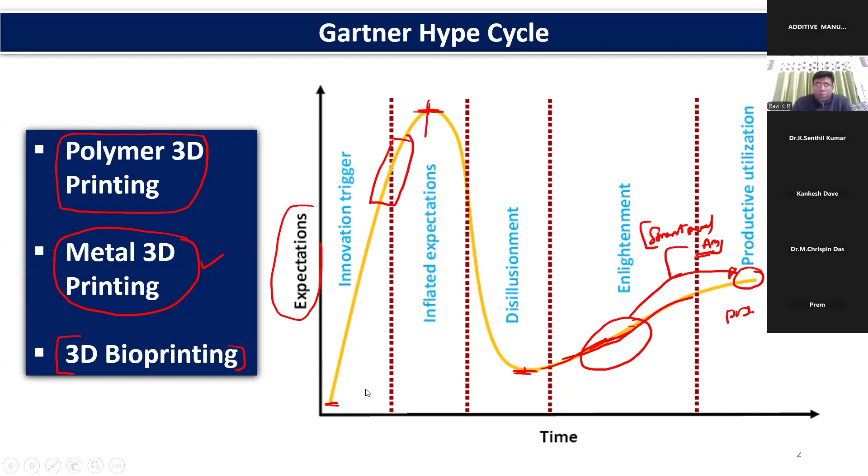If you look at 3D printing, metal additive manufacturing is not very different. All 3D printing technology goes through this particular cycle: initial CAD model, creation of STL file, slicing software, and creating the tool path. Then where does the difference come? The difference comes at the 3D printers we use.

There are different types of technologies available for polymers and different types for metals. Within metals, there's a wide range of technologies available. Most of the changes we see are on the 3D printer part - how we print the parts based on the feedstock material and the kind of source, which can be a heat source like laser or electron beam or other different sources. That's how 3D printers actually differ, and this is where the process is completely different from one 3D printing technique to another.

First of all, we all have questions about when to use additive manufacturing. Traditional manufacturing is actually still being used - I would say additive manufacturing is complementary. It is not going to replace traditional manufacturing technique, because in traditional manufacturing, as long as the complexity of the part is not very high...

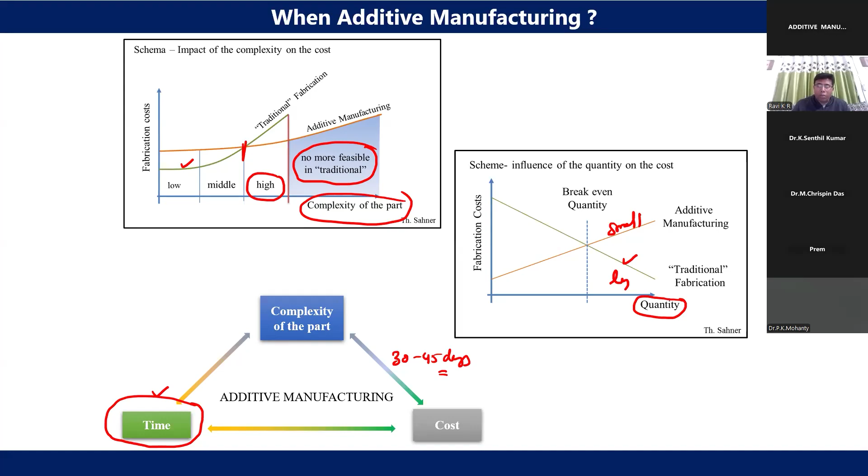If you look at additive manufacturing, especially metal additive manufacturing, we have 4 different categories based on powder bed or feed based process. If the powder bed is used, it's similar to the SLS process in polymer, so we use a bed here depending on the source to melt the powder.

It can be a selective laser melting process or electron beam melting process. In electron beam melting, we use electron as a source. In selective laser melting, we use laser as a source.

On the other hand, we can use laser as a source to melt the powders. In this case, we don't actually have powder beds. We flow the powder instead, similar to welding. Instead of filler materials, you feed the powder to the system, and that will be melted using the laser.

This process will be connected with either a 5-axis CNC machine or through a robot, and we can do the process that way. Instead of powders, one can use wire also, which is what we call wire arc additive manufacturing.

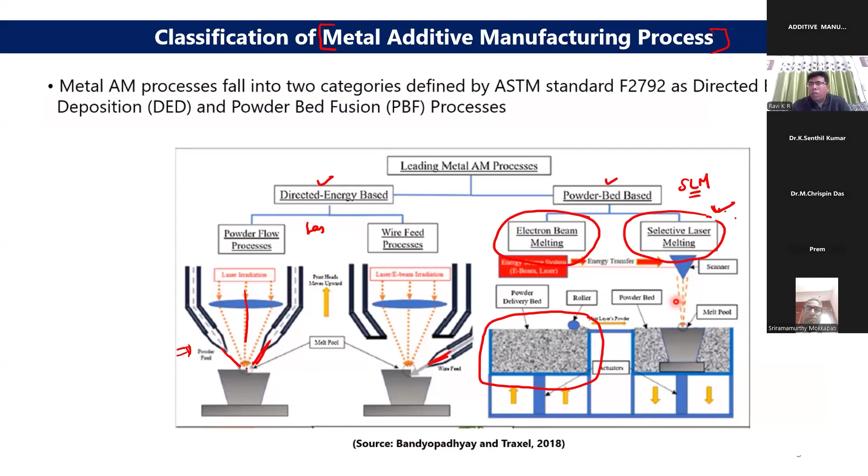In our group, we are doing a lot of work in the area of direct energy deposition. I'll concentrate more on how we converted a normal DED machine into a smart additive manufacturing machine. But since selective laser melting is very widely used, I'll give a glimpse of that technology first, then we'll get into the direct energy deposition process.

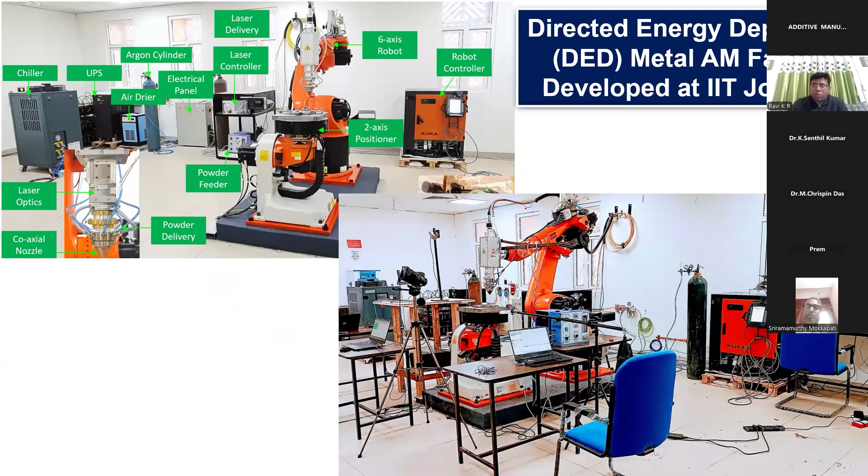If we look at the kind of technology we have in IIT Jodhpur, this is a machine that we built from scratch, available in my lab. It's a direct energy deposition facility that we built from scratch. We actually developed 2 machines — one is in my lab, and another one we built working with an industry partner.

This is the final machine that we built for our project, and we built one at the industry partner as well. These are final machines for direct energy deposition. Both of these two machines are indigenous machines we built from scratch.

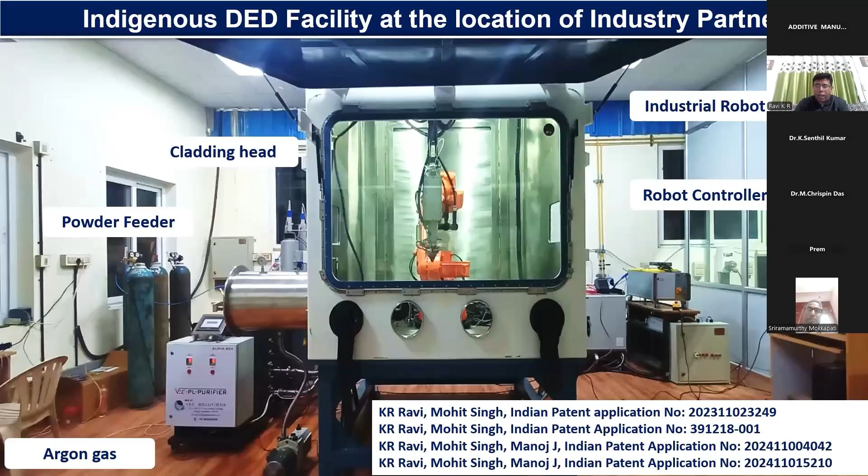In addition to that, in IIT Jodhpur we have a laser powder bed fusion machine, which we did not build ourselves — there is a company in Bangalore that made this particular selective laser melting, laser powder bed fusion machine. In addition, we have electron beam melting, which is the first such machine in any IIT or IISc in India — an electron beam melting additive manufacturing facility.

Though I'm not going to discuss this particular technique in today's lecture. Let us first try to understand what laser powder bed fusion is. I hope yesterday's lecture by Dr. Vinod would have given a glimpse of this particular process, but I'll just brief this process — I hope I'm not going to repeat it.

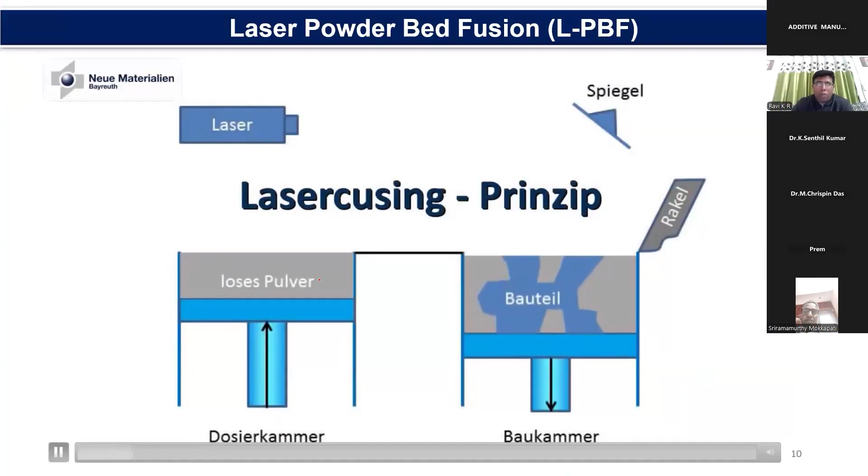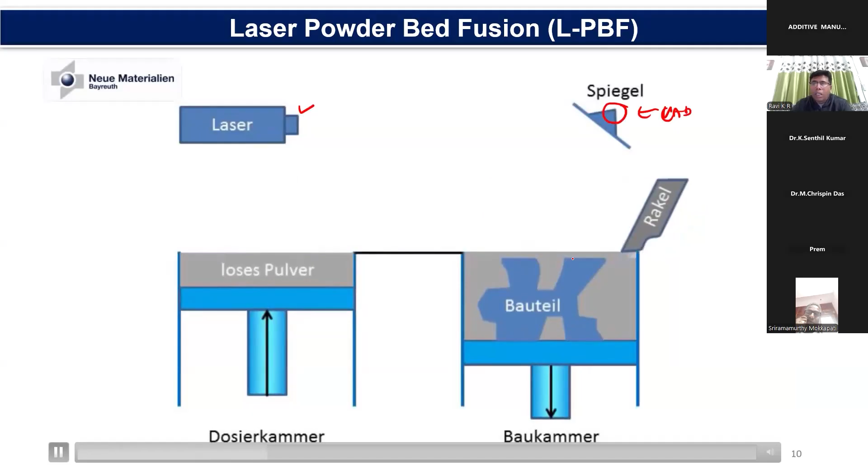If you look at this process, as I told you, we fill a layer of powders, usually in the range of 30 to 40 micrometers. We use the laser source, and the galvo moves depending on the CAD file we generate. Each layer is printed layer by layer, then the bed moves down, and again we print layer by layer in this process.

In this case, the feedstock is powder. The laser will melt the powder in a localized region depending on the CAD file created for that particular layer, and the galvo will take different regions of the powder bed to melt with the laser.

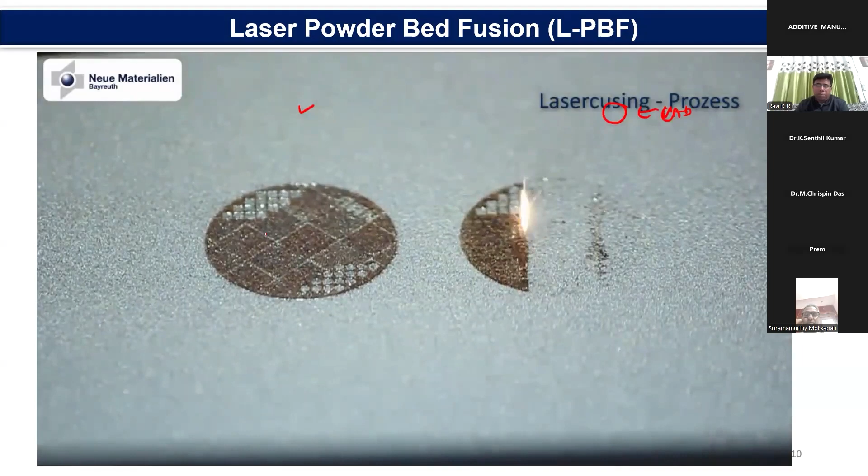Now the question is, are all metals and alloys printable? We may think all metals are printable, but the answer is no. In powder bed fusion process, or laser powder bed fusion, and in DED process, we use laser as a source to melt the powders. In both cases, absorption of the laser is very important.

We usually use laser somewhere around 1064 nanometer, it can vary from 950 to 1064 nanometer. All materials have different types of absorption. The material should absorb the laser; if it absorbs, it can melt the powder. If the material reflects, you cannot melt the powder.

If you look here at gold, silver, and this material... this is silver, this is gold, not silver. This one is silver and gold, aluminum and copper. Look at gold, silver, and copper in this condition - to an extent they don't have much absorption, which means these materials you cannot actually print. On the other hand, if you look at iron, it has almost 40 to 45% absorption. If you take steel, it would be somewhere in the range of 50% absorption.

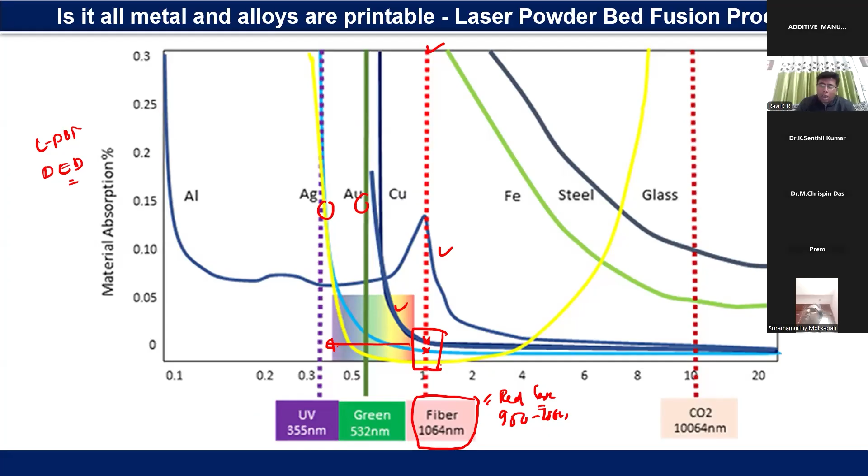This particular graph gives a much better idea of how it works. Around 1064 nanometer, this is a standard IR laser. In this range, nickel, titanium, and steel all have significant absorption, so you can melt the material. Other materials like copper, gold, silver, and aluminum have very less absorption in this range, so you cannot actually print these materials.

Now the question is, can you print all types of powders or not? For any of these processes, the particles should be spherical - we generally call these thermally sprayable powders. If it is not spherical, you will not get uniform powder feeding, which would have a lot of impact on your final product. Usually all powders are not printable; the first requirement is that it should be spherical.

If it is spherical, can I use all powders? What about the size? The size also varies depending on the technology used. Especially for laser powder bed fusion, it is usually smaller, around 15 to 50 micrometers. On the other hand, for DED we use 50 to 150 micrometers, because the bigger the powder, the smaller the resolution. But unfortunately you cannot use smaller size powder for DED, because the powders flow under gravity. Though we use carrier gas, it's not good enough to carry the powder smoothly to the molten pool, so you need powders of slightly bigger size.

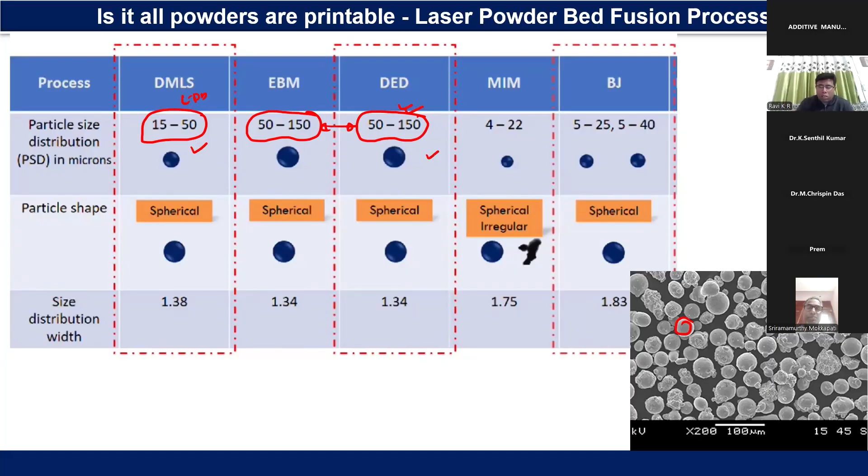In electron beam melting, there are very complex phenomena, so I'm not going to discuss that in detail, but the powder size is more or less the same as for direct energy deposition. Today's lecture will concentrate on powder bed fusion and DED. I have already discussed the powder bed fusion process, now we'll get into the direct energy deposition process.

In direct energy deposition, there are two variants we use: one is based on CNC, and some machines are based on robots, depending on the requirement. If your interest is in making smaller parts, you should go for a CNC based system. If you are interested in making bigger parts, you should go for a robot based system.

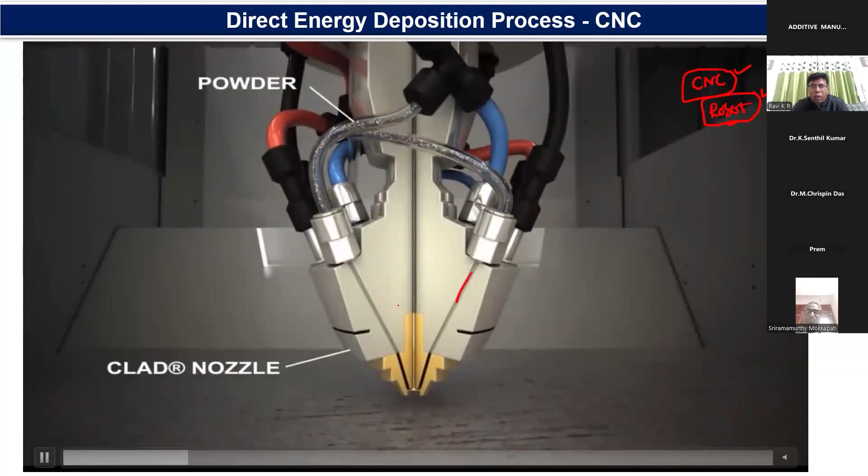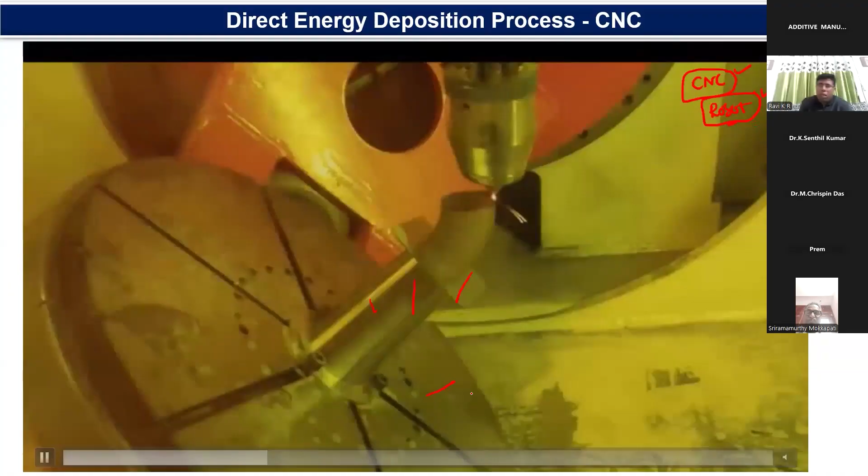Now we can look at how the technology works. In this system, the powders are fed through a coaxial nozzle and the laser comes from the center. This powder will melt with the laser. The whole head starts moving depending on the CAD file given to the system. This motion of the laser head and the substrate is controlled by a 5-axis CNC - you have 3-axis on top and 2-axis on the bottom. On the other hand, in a robotic system, which I'll discuss next, you can have 5-axis, 6-axis, or 8-axis robots, depending on the features wanted.

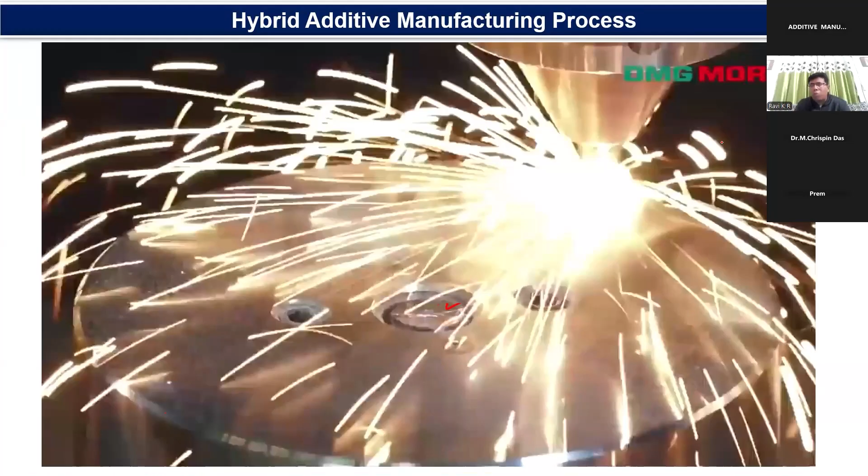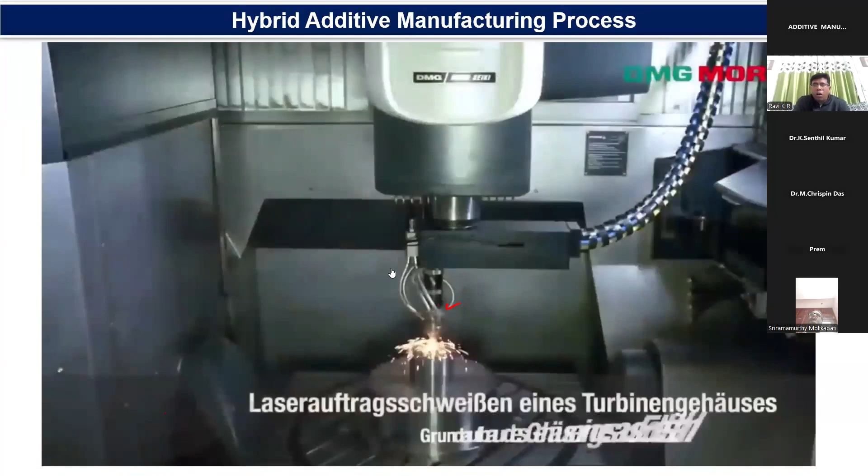Hybrid manufacturing is something I'm not going to discuss in detail - it's about doing both printing and machining, because printed parts usually do not get a good surface finish. One can do both printing and machining on the same platform using CNC.

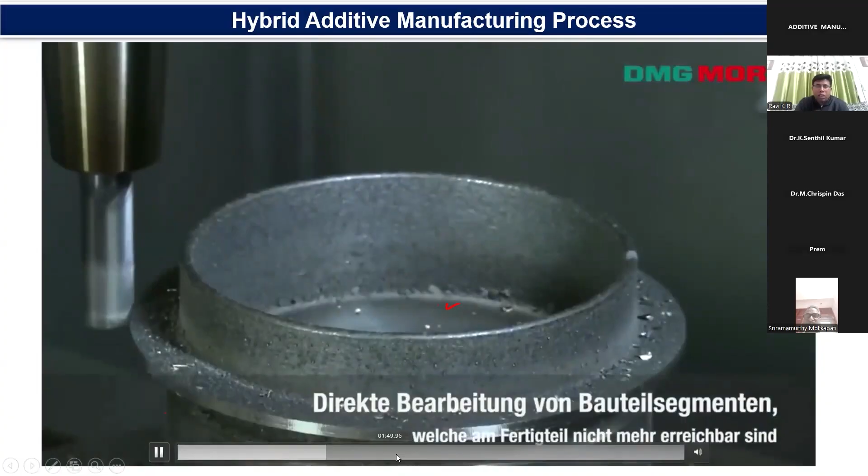The program-wise, it is the same, because the program we use for a CNC machine can be modified slightly. One can use a similar program for CNC for both printing and machining.

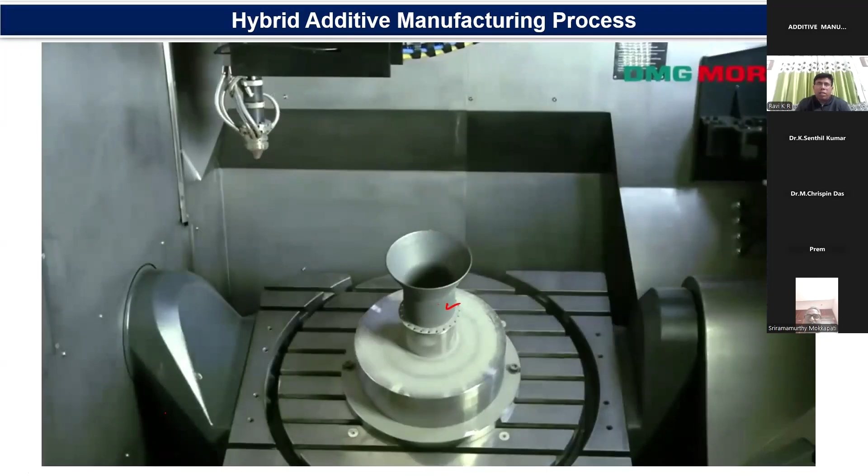You can see now the printing is going on. One would actually use the same platform, just take out the head, move the head, and you can do the machining also on the same platform. Once we complete the printing, you can do machining too.

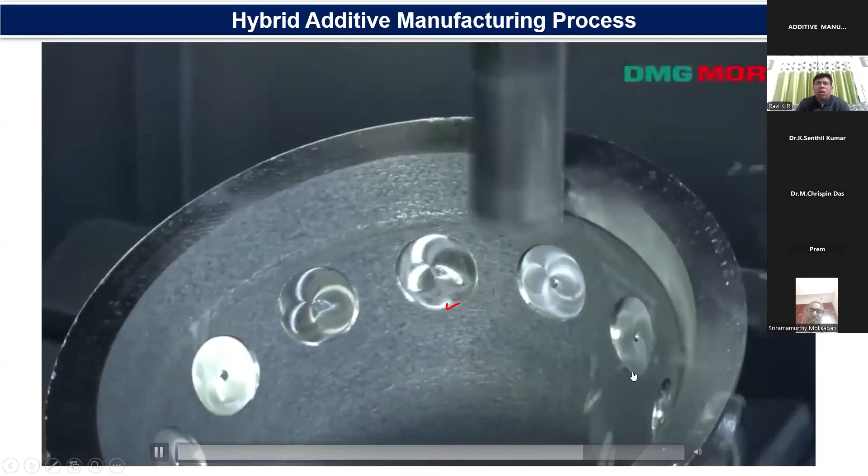But there are challenges, though I'm not going to discuss them now. Though it was invented long back, it is not in real practice, because there are certain issues in terms of understanding and utilization of the process.

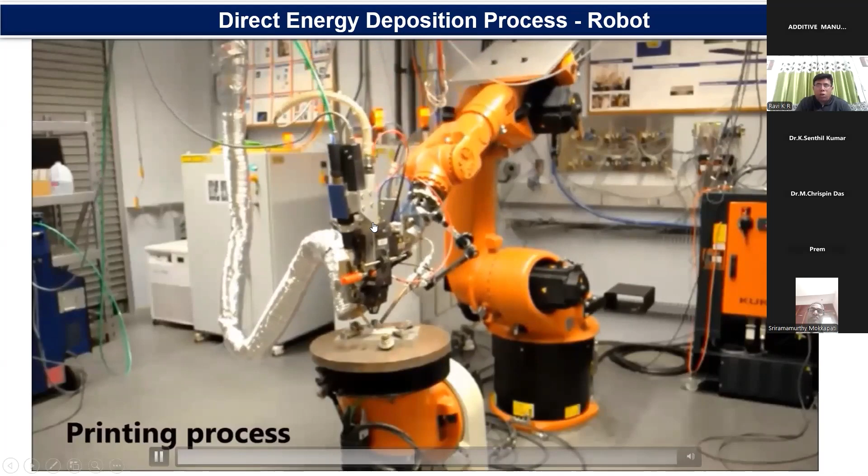So the technique I have in my lab is very similar to this robot-based system. You are going to have 6 axes on the top, and the bed is going to have 2 axes - it will rotate and tilt - with the other 6 axes coming from the robot. It's more or less similar. The major advantage is that you can go for very big components. In CNC, the volume of the part is decided by your bed size.

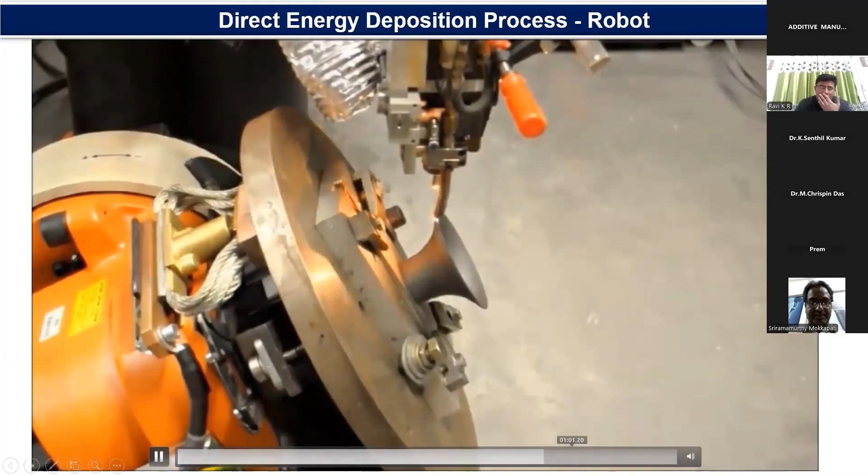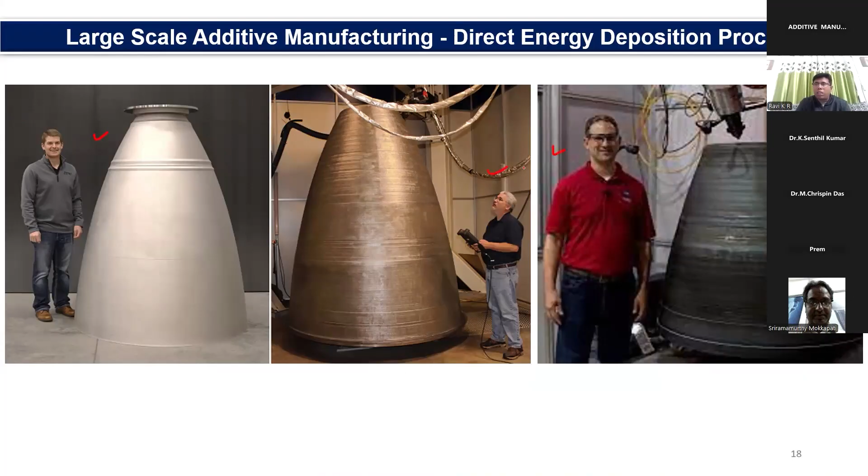As I told you, in direct energy deposition, one can make very big parts. You can see that here. In addition, it is very useful for repair manufacturing, especially turbine blades, where you need proper control over the crystallographic orientation, which cannot be achieved by normal welding technique. Repair manufacturing is one of the major advantages of the direct energy deposition process.

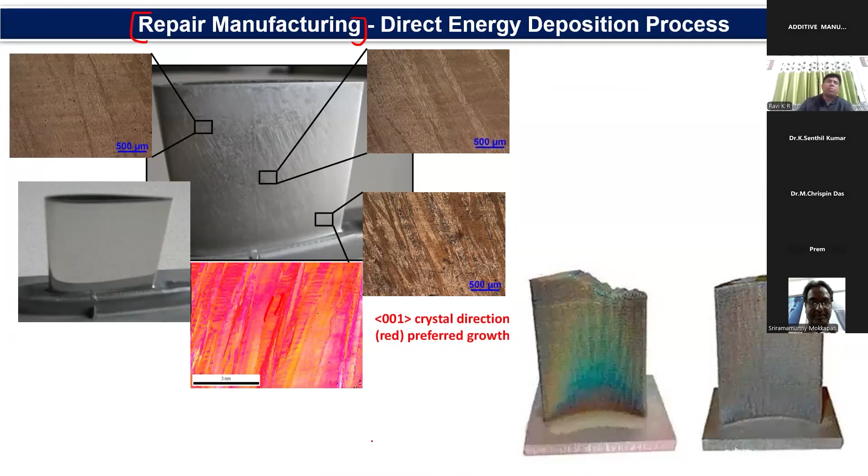Another thing is one can make functionally graded material, which is having a lot of interest using this direct energy deposition process. One can make multi-material because you can feed different types of powders at different layers, and within the same layer also have different types of powders. You can make composites, including graded composites, using this technique, which is very useful for various applications.

So if we look at the technique-wise comparison, why do we use certain conditions for powder bed fusion versus DED process? If you really want a big part, the laser DED is better. But if your part complexity is very high, then we should go for powder bed fusion, because in powder bed fusion you don't have any design constraint - you can print any complex parts.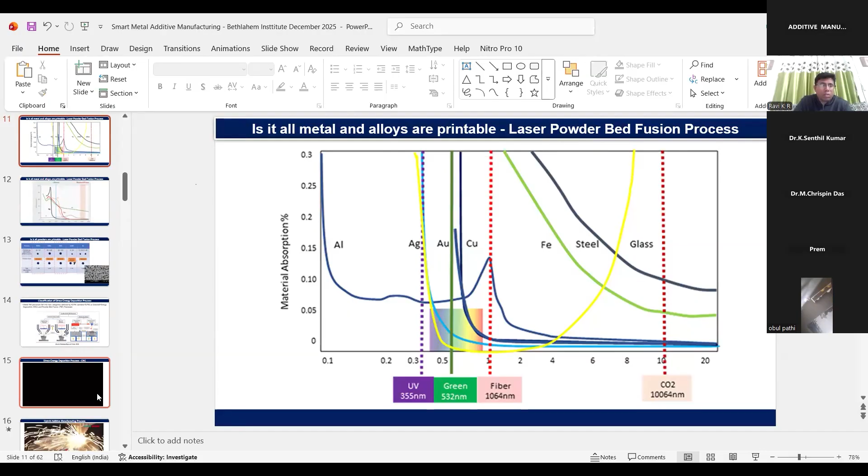The powder size, which I already discussed - one thing I did not discuss earlier, though we use laser in both cases, usually we use 100 watt to 500 watt in a powder bed fusion process. On the other hand, in a DED process, we start with 500 watts.

In DED, we start with 500 watts and go up to 3000 watts because you need slightly higher laser power. Obviously, the higher the laser power and the bigger the size of the particle, your surface finish would be poorer. On the other hand, one can actually print the part much faster.

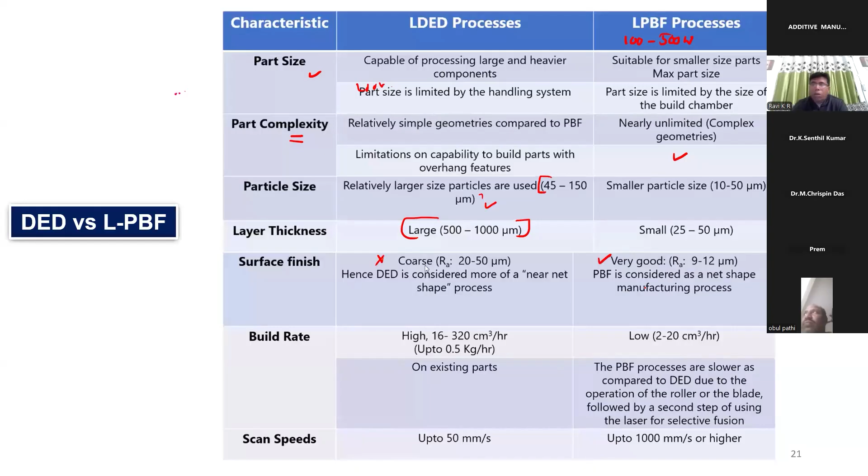As I told you, we are using 200 watts here, while we use higher laser power in this particular condition. Because of this higher power and coarse particles, you will always get good layer thickness and your productivity would be very fast. But on the other hand, surface finish would be a problem. If you really want good surface finish, you should go for a powder bed fusion process. The build rate, since we are using higher laser power, higher layer thickness, and bigger powder, gives a very high build rate.

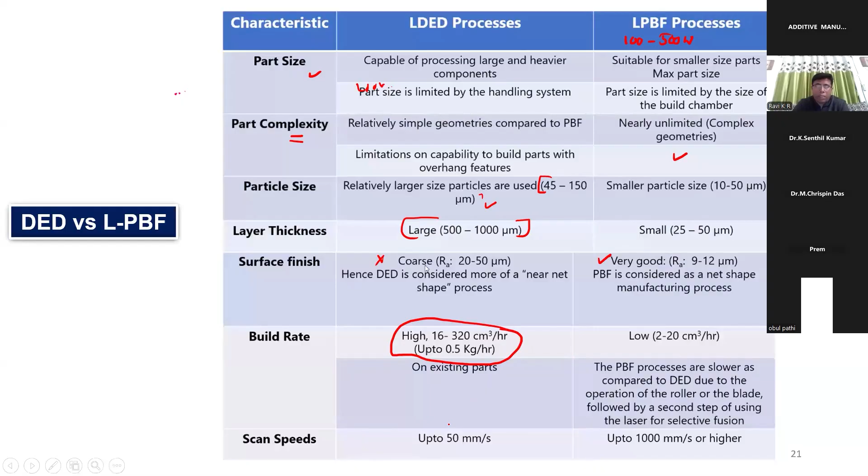The scan speeds, in terms of productivity, DED is better. Multi-material capacity, as I told you, DED is better, and repair can be done in this process. The design freedom is low when compared with powder bed fusion process. In powder bed fusion, the design freedom is extremely high - it's like my polymer printer, you can give any design and print the part.

This part, as I already told you, has about 13% of market share, while this one has 72% of market share.

Okay, now we'll get into the part of smart manufacturing. Till now, I have discussed the conventional manufacturing process.

Now, when you look at the quality of the part or object that we make, it depends on many parameters. One thing is you need to have the accurate dimensional accuracy that you need, which comes from the accuracy of each deposited layer, then the volumetric accuracy.

This depends on what kind of scan strategy we use, accuracy of the deposited tracks, 3D model resolution, layer thickness, and powder particle size. As I told you, the bigger the layer thickness, the lower your accuracy would be. Again, the bigger the powder particle size and morphology, the lower would be your accuracy.

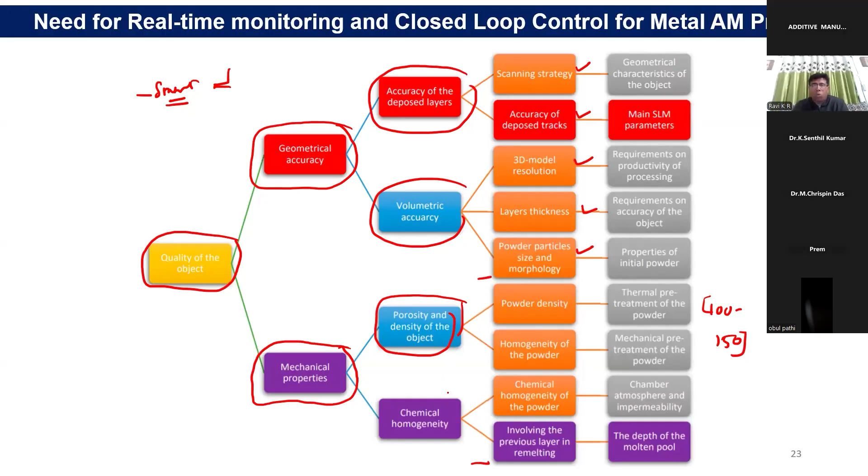So if you really want to have minimum defects and chemical homogeneity, we need to have a smart metal AM process.

But all these parameter variations are usually done by people using the conventional, traditional method—making the parts and then checking the microstructure and mechanical property. Then you vary the parameters and repeat this process. By doing this, even for any new material, you need 1.5 to 2 years to identify the optimum process parameters. So what is the alternate option?

The alternate option is to do a modeling process. Either you can do a CFD simulation—heat transfer and fluid flow simulation—yes, you can do it.

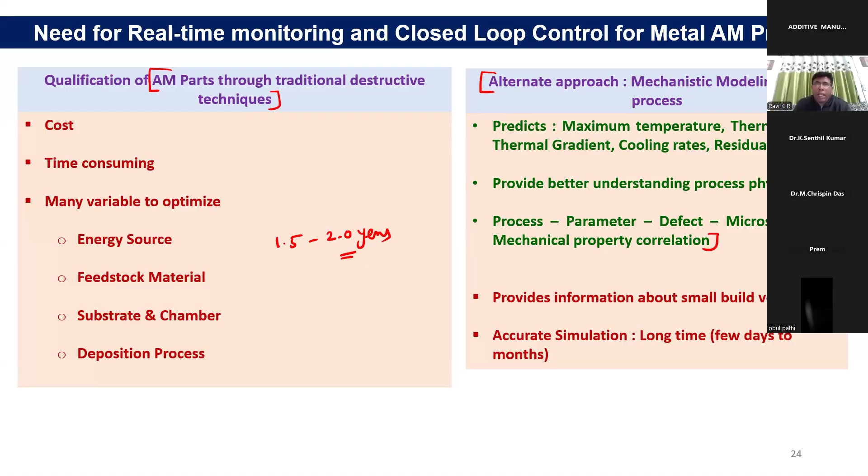Usually, let's say I want to print one layer from here to here. This will be done in 30 seconds. For that condition, if you want to run a simulation process, it will take 30 days.

Imagine making a full component—running a simulation like that is not possible. But usually we run a simulation for a single layer, or maybe multiple layers, fine. But the thing is, even for identifying the optimum condition without doing an experiment, one can actually do it, but you need to spend a lot of time on that.

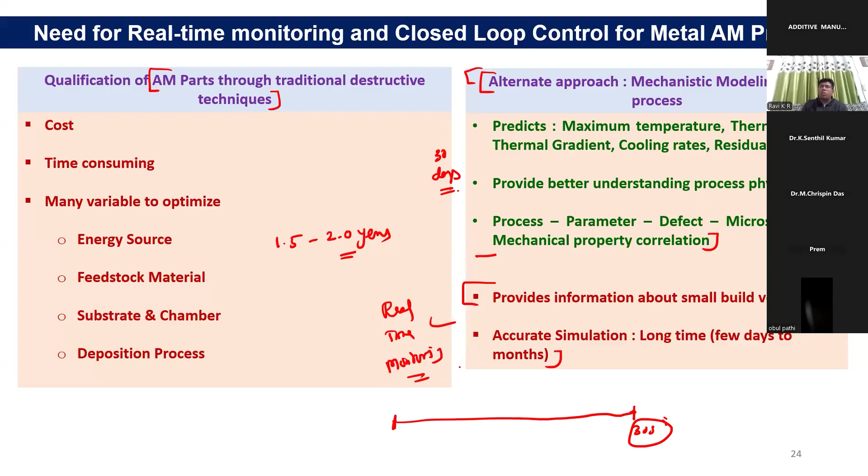So what is an alternate option? That's where we come to a technique called real-time monitoring—meaning in-situ monitoring of this process using several sensors. One can understand exactly what happens during this additive manufacturing process.

As I told you, various types of sensors are available. In our lab also, we have various types of sensors. But the thing is, each sensor gives you information from a certain region. If you look at this whole process, you can consider this is your bed—something happens below the surface, and something happens above the surface.

So usually most of these techniques give you information about what happens above the surface—it can be the geometry of the melt pool or the plasma plume, whatever comes from the top of the surface. But nothing gives you what happens inside.

But what happens below the surface is important, which actually influences your final outcome in terms of microstructure, defect, and property. Most of the techniques cannot provide that kind of information, except for a few techniques which I will discuss a little bit later.

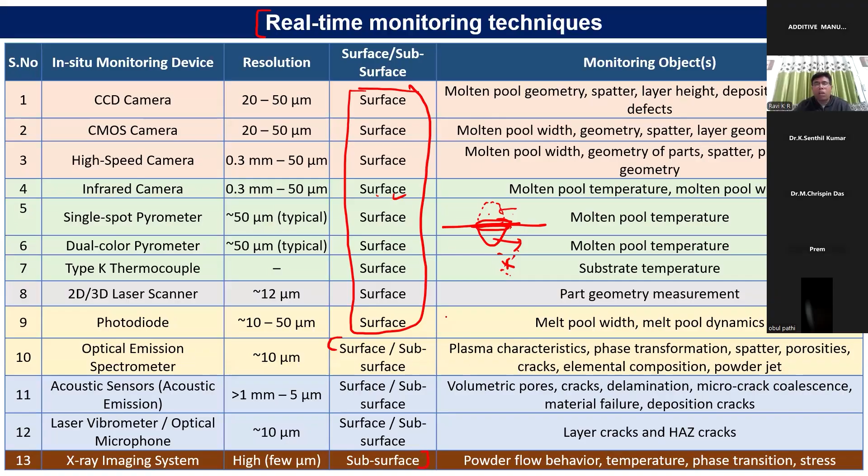Another thing we need to do is monitoring—monitoring means I can identify the defect. But identifying a defect is not good enough, because I need to control it so that a defect won't form. That is what we call closed loop control, which I will discuss a little bit later.

Okay, now let us look at real-time monitoring. This is real-time monitoring where we use a high-speed camera. One can get the powder distribution, powder size, and flowability. One can understand the melt pool width using the high-speed camera. The spatter formation can also be understood using this high-speed camera. These are our own results.

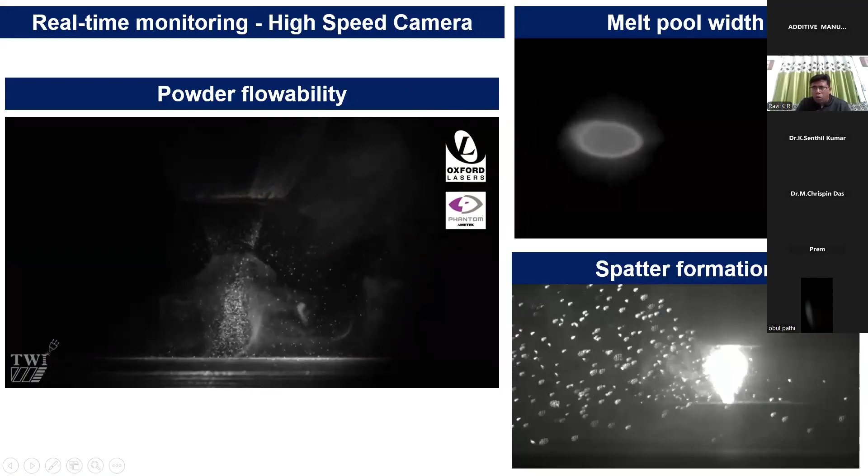So this is one of the interesting techniques, though it cannot be connected with normal machines. This requires a synchrotron facility. We do not have anything like this in India at this point of time, or else you need very high energy X-rays.

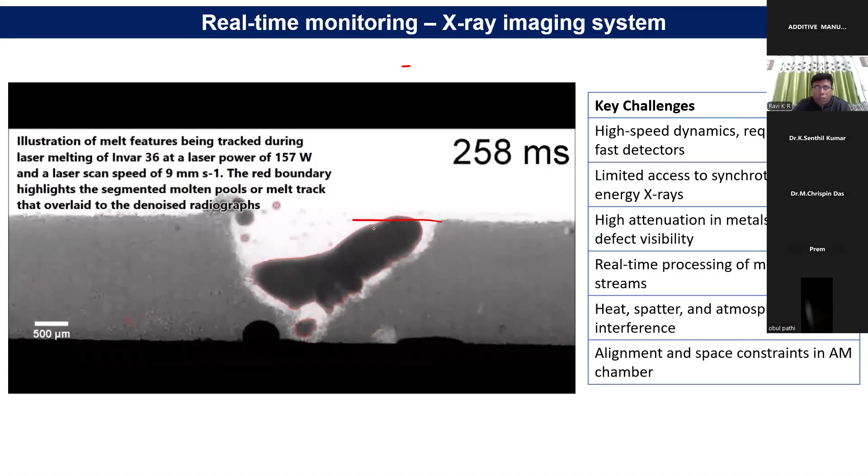You can see here what happens on this surface. I need to understand what happens on the subsurface. This particular technique will give you an idea about the defects, these are the defects which are forming, and this understanding is very important. This can be done using X-ray imaging, but this technique will only give you an idea about how the defect forms. You cannot actually use it to control the defects. You can see all this information very nicely.

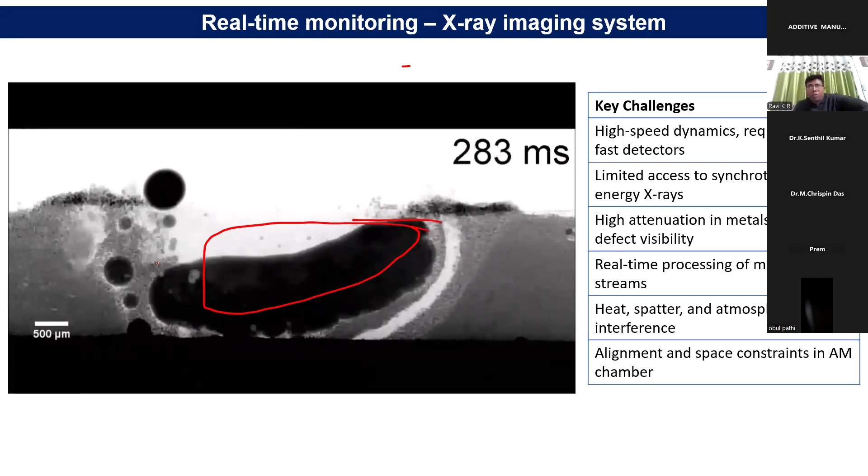On the other hand, one can easily control the defect using an IR camera, which I will discuss a little later. One can use the IR camera to understand the melt pool width, length, temperature distribution, solidification rate. One can also identify whether a keyhole defect is formed, or a lack of fusion defect is formed.

But these techniques usually come in the form of video. Then the video should be converted into images. Then you need deep learning algorithms to identify the classification of defects. In real time, it would be a very complicated process. You will get a large volume of data, which is very difficult to analyze by human eyes, and you need very sophisticated computational algorithms, like deep learning algorithms.

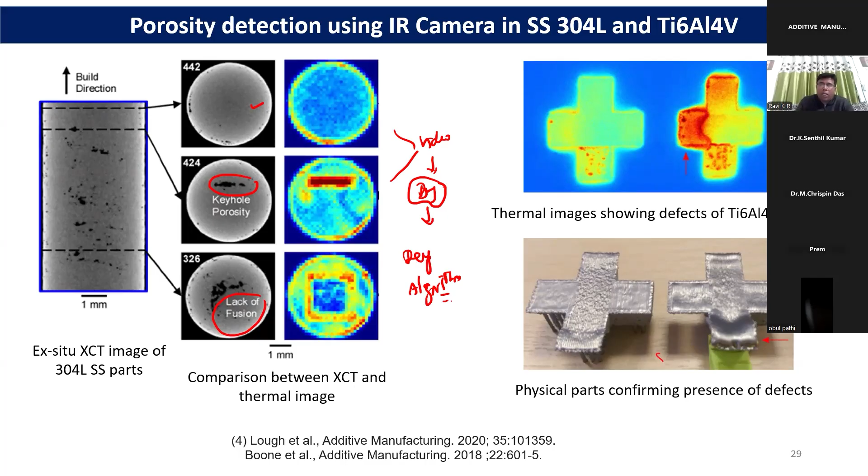Even with the deep learning algorithm, you will have a large volume of data which is not useful while you are running this machine. This machine runs 2-3 days continuously to make the parts, so you will get several terabytes of data. Analyzing that data would be very difficult.

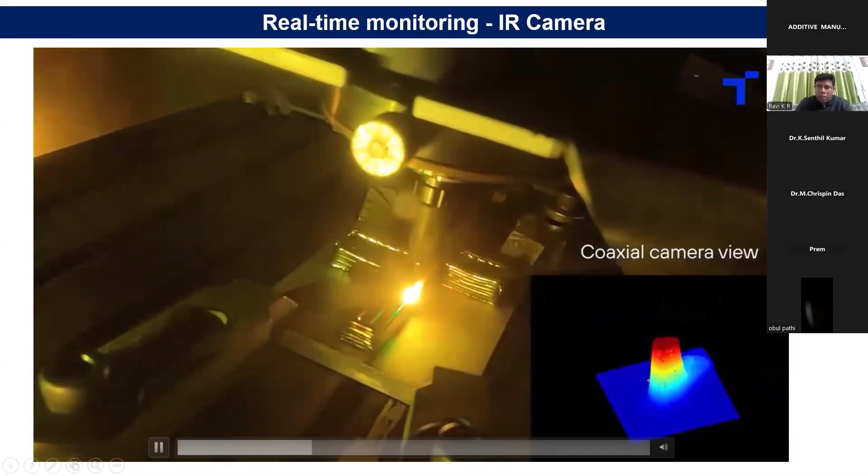But this technique has the advantage of looking at this coaxially. One can actually understand how the temperature profile occurs during the printing. This is one of the real-time monitoring techniques people use, the IR-based process.

Okay, now we'll come to this technique. What kind of defects will we be getting? Usually we get lack of fusion defects, keyhole defects, and we also get balling and spatters.

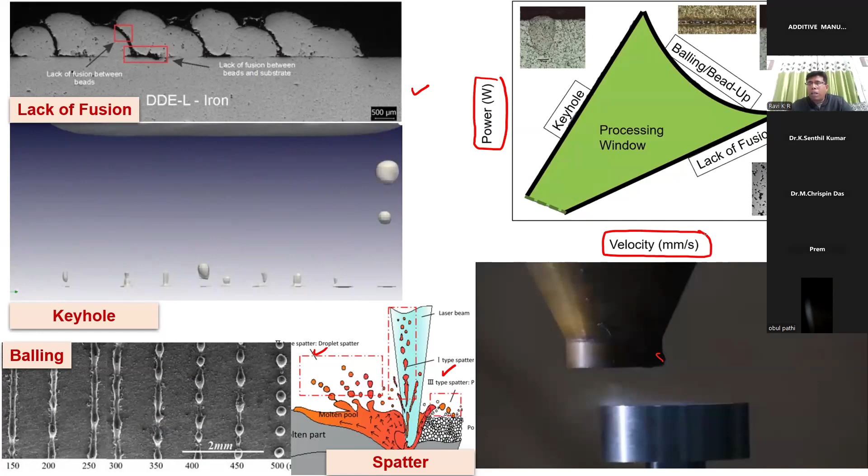To understand all these defects, as I told you, there are many parameters, but usually we control two parameters, keeping all the others constant. These are the two major parameters: the laser power and the velocity under which we work. Usually you can get an optimum processing window for additive manufacturing this way.

This is how one would actually do this parameter optimization, by trial and error. Let's say I have identified the optimum processing window, the optimum laser power and velocity, keeping the other parameters constant. Now I'm building with these optimum parameters.

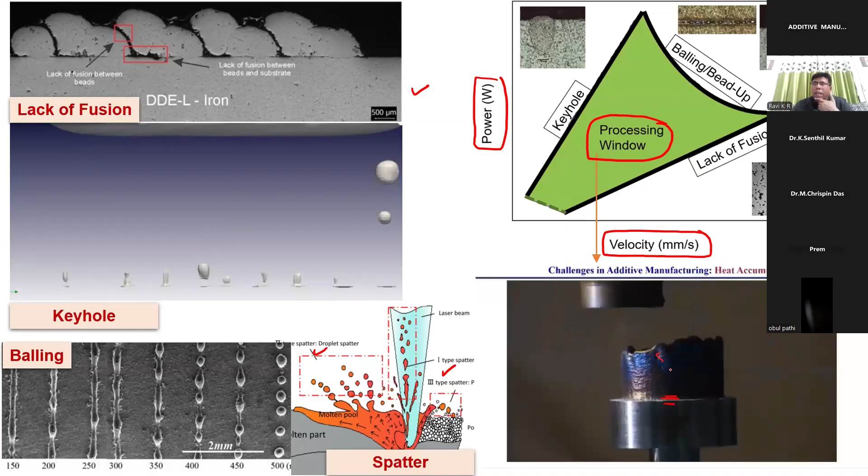Now you see the first few layers, it was working perfectly. The moment I get into more number of layers, I could see that the part is getting deformed. It is not actually printing as per my requirement. You will see that the first few layers print properly, meaning though I am using the optimum processing condition, that condition is optimum only for a few layers, especially when we use direct energy deposition, especially when we make thin walls—it becomes a problem.

Because when you start the first layer, heat transfer occurs through three different mechanisms: conduction, convection, and radiation. The moment you build more layers, let's say 10 or 15 layers, then heat transfer starts occurring only through the convection and radiation mode. So obviously there will be enough heat accumulation occurring in the process.

If you look here, the parts, when you start initially, you will have some amount of melt pool width. You see that the part is getting continuously deformed, and it will start moving in different directions. Some of those who worked in wire additive manufacturing would see something like this, the parts would be going this way. This is because of this heat accumulation.

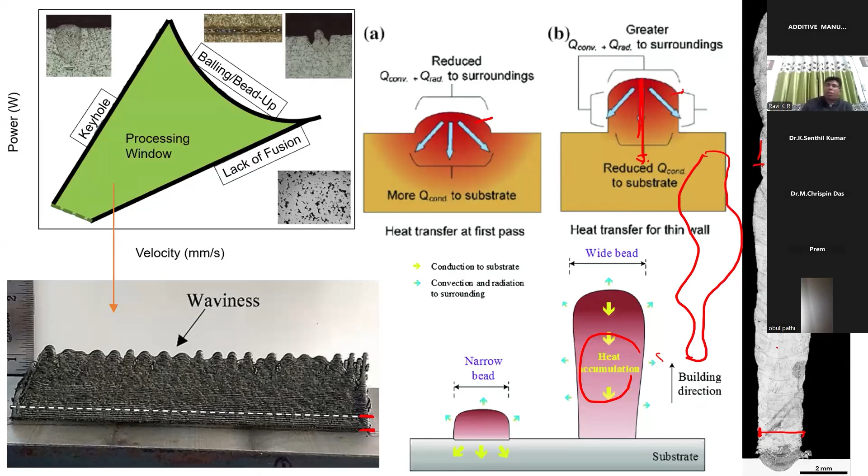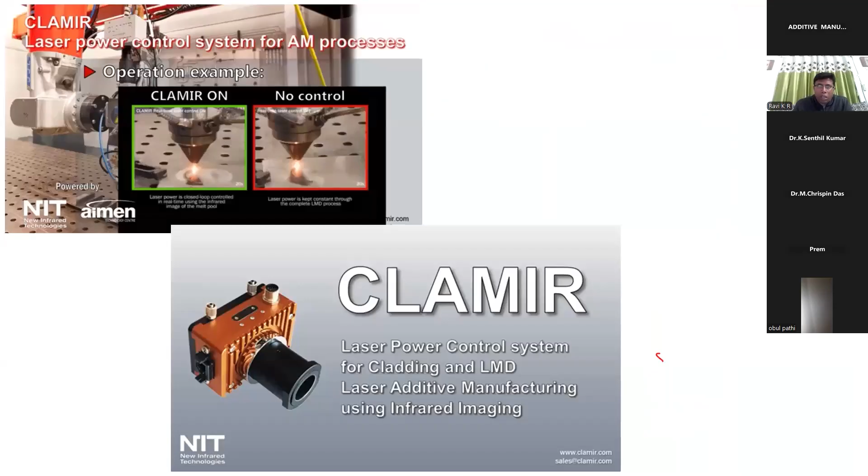So there is a technique called, as I told you, the IR camera. Using the IR camera, one can control what is called CLAMIR technology, controlling the melt pool width. By understanding the melt pool width, you continuously decrease the power you give through the laser. One can control it by keeping the melt pool width constant, and easily print it, as you can see here.

So when we start with 1400 as our laser power, finally we end up with 700 as our laser power. That means continuously I'm changing the power, the power requirement is continuously getting changed. I'm trying to decrease it.

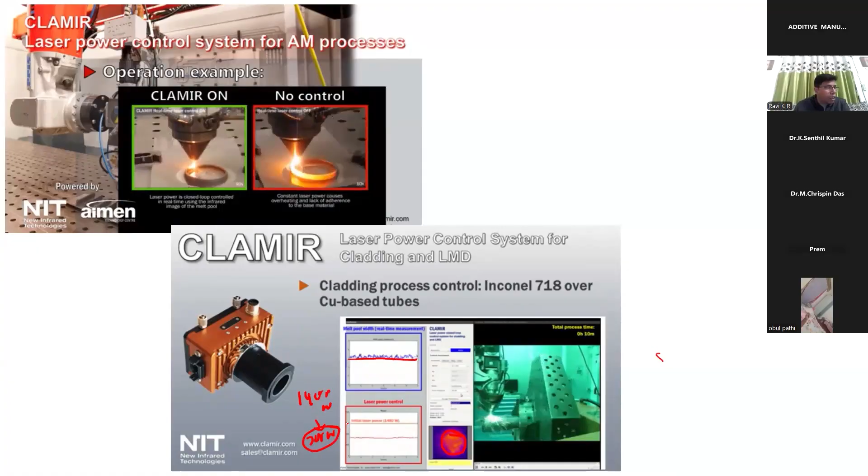Okay, but this technique will not give you what happens below the surface, because we are actually putting a camera on the top. So at best you can measure this particular melt pool width.

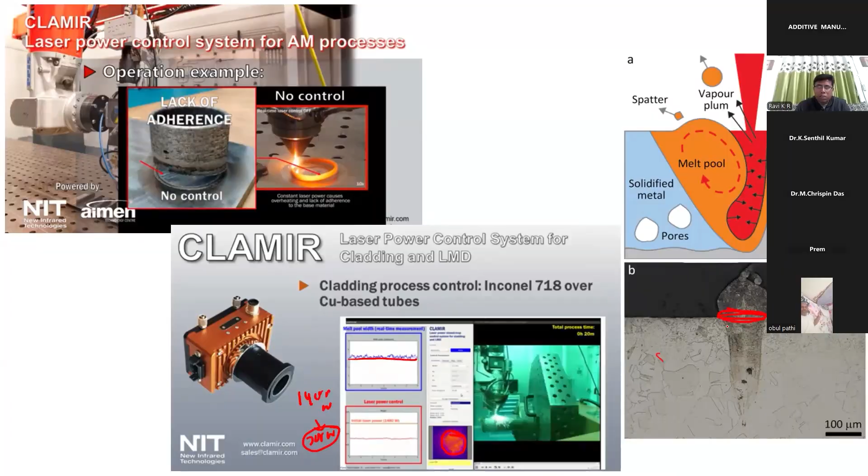Okay, so now I'll come to the work what we are doing in our lab. We have integrated a CMOS camera, high-speed camera, dual color pyrometer, multi-wavelength pyrometer, thermocouples, scanners, optical emission spectrometer, acoustic sensor - all these things we have integrated in our system. We use real-time monitoring using all these tools, and our closed loop control we do with optical emission spectroscopy. I think we're the only group in India doing this kind of work, no one else is doing it in India.

So what benefit we get here is, as I told you, in image-based systems like high-speed camera or IR camera or CMOS camera, you will get a lot of images, you will get image distortion, you will get a lot of false data. You will never get the melt pool depth information, which is very, very important to understand this additive manufacturing process. You get a large volume of data, very slow signal processing - all these problems we have.

On the other hand, when I use this particular technique of optical emission spectrometer, one can easily do defect detection, defect categorization, real-time melt pool geometry analysis. With this technique, I get a signal at every 1 millisecond, which I can correct with another 1 millisecond. Every 2 milliseconds, I can actually correct the overall process. So this is a very efficient tool for closed loop control.

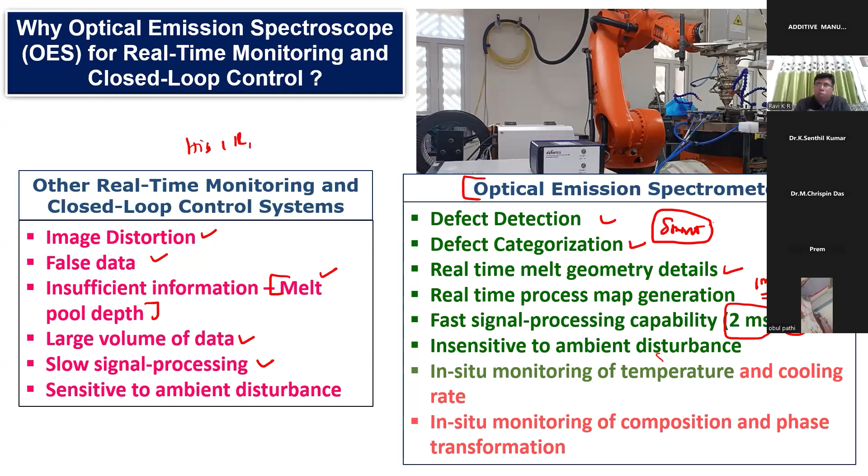I'll not get into too much detail. This is how the sensor looks like. The sensor should actually - this we call a collimator. We need to keep the sensor as close as possible, which is not easy. But we have come up with some sort of technology we call a collimating lens probe guard. Using that, we were able to go very close to where we are printing. So we were able to bring down the noise so that you get a very good signal to noise ratio. This led to 2 patents.

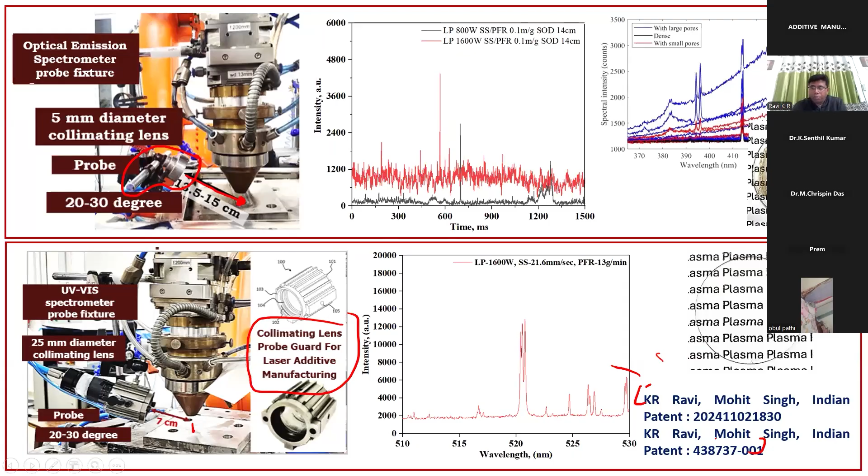So what do we actually measure? When we do the laser metal interaction, plasma gets created above the top of the surface. This plasma, what comes out, we actually take it to the detector that measures the plasma plume intensity. The plasma plume intensity will look something like this - it will have a spectrum with different wavelengths. Each peak corresponds to a particular element.

Okay, again, these are arbitrary units. Arbitrary unit means if you change the distance between the plasma plume region and your sensor, it will vary. If you change the angle, it will vary. Everything would be changing. So you have to convert this arbitrary unit information into meaningful information. That's where we've done a lot of work on calibration, to make this information meaningful. This led to 6 patents in this particular area.

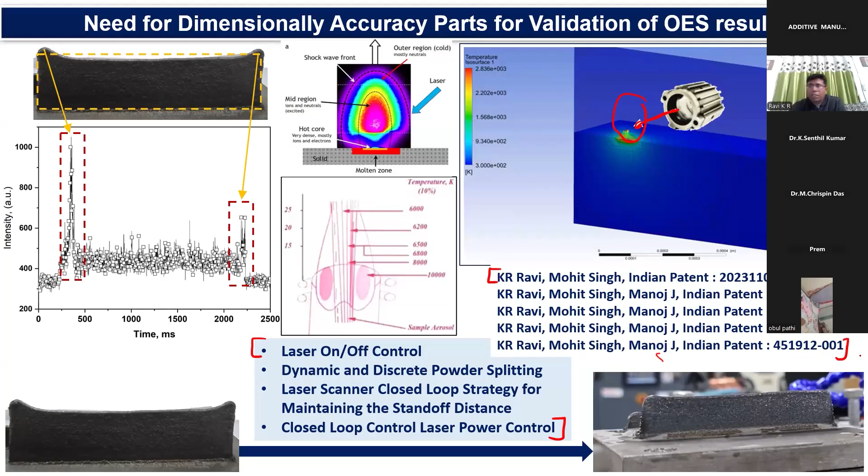So now, based on all the analysis, we have identified one particular wavelength which is very useful for this analysis. We took this particular spectrum and tried to correlate it with the melt pool width. I'll not get into too much detail, but melt pool width and intensity clearly establish two parts - one is the conduction regime, another is the keyhole regime. As long as you are in the conduction regime, you will get a good melt pool geometry, which gives you parts without any defects.

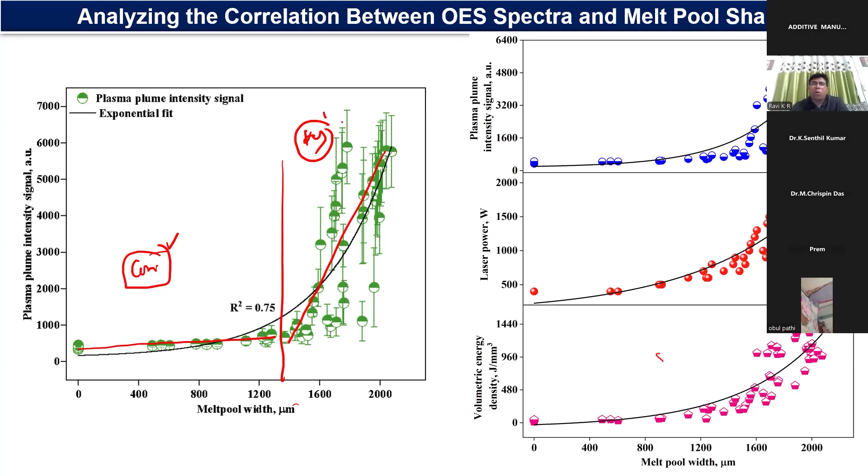Once you jump into this keyhole regime, there will be a lot of defects. Similarly, we tried to correlate the melt pool depth with the plasma plume intensity. Again, in this case, you get a non-linear correlation between the two.

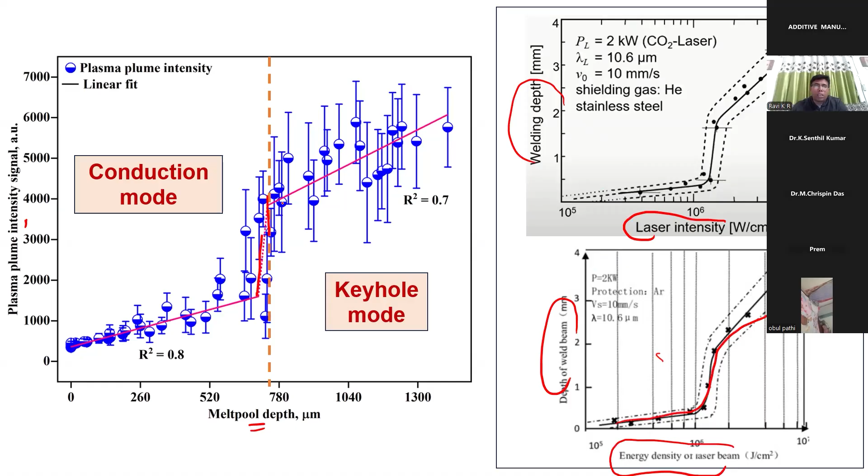Then we were able to get the conduction to keyhole region transition. People have identified a similar kind of shape change when we use laser intensity with melt pool depth, and depth versus energy density. In all these cases, the features are more or less similar. One can observe initially conduction mode, then a transition regime would occur, and from then it will go to keyhole mode. That's not of much interest.

What we wanted to know is the connection between melt pool width and melt pool depth. This is important to understand, because in some cases the melt pool width would be the same, but the depth would be different. That is something which is very important.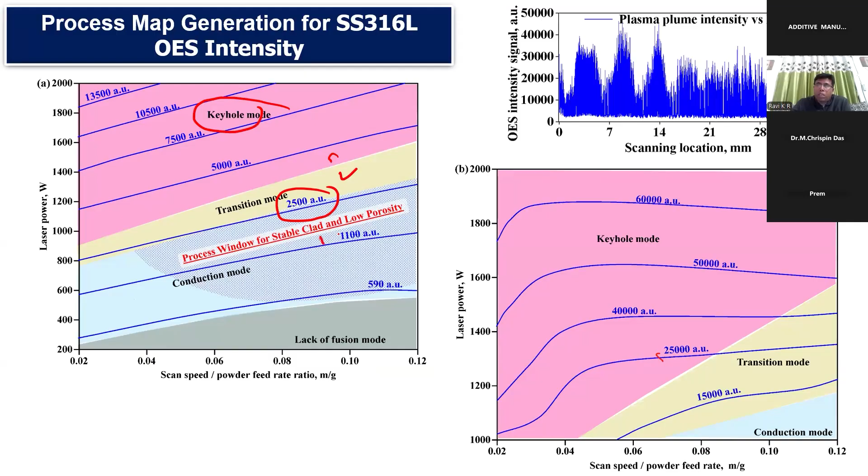In this process, we were able to easily capture the melt pool depth and width using this particular technique. I'll not get into too much detail. Using this technique, the intensity value I get, which is in arbitrary units, allows one to identify whether you are in the keyhole regime, the transition regime, the ideal processing window, or the lack of fusion mode. So we were able to capture it.

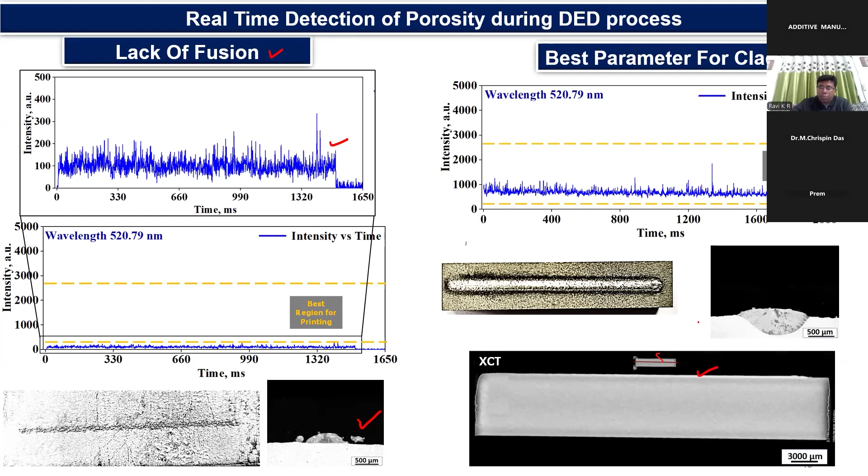That we have validated with experiment. When I did an experiment in the lack of fusion regime, which was identified by this particular spectrum, it was validated experimentally and showed lack of fusion. When I used the best parameter for clad and used tomography, we identified there was no defect. I'll not get into the detail of this particular technique.

When we work in the keyhole regime, we identified certain sinusoidal peaks forming. Each collapse of this corresponds to keyhole collapse. What we identified is that porosities were forming in that region. These are the regions we identified with probability of pore formation, and there is experimentally observed porosity in a similar location.

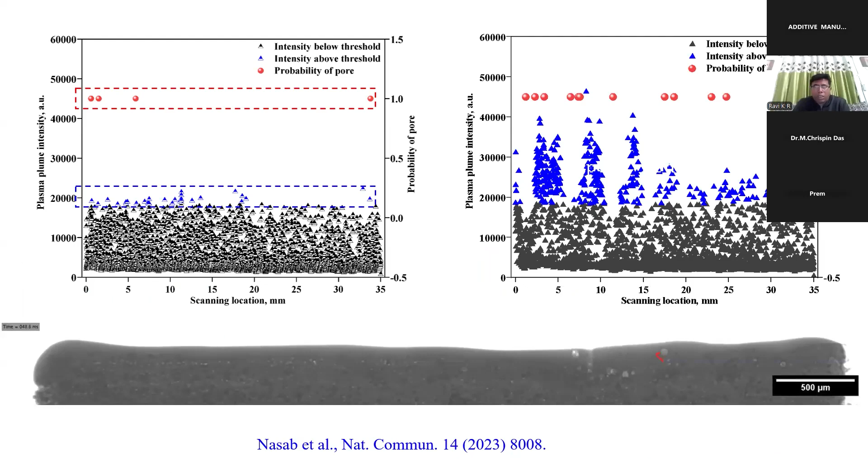That means we are able to identify where these defects would be forming, whether it's lack of fusion, conduction mode, or keyhole mode. That's another patent we have filed using this technique. There are some cases where we may not be able to identify the accurate position, which I won't discuss. So until now, we were able to identify all the features required for identification of defects.

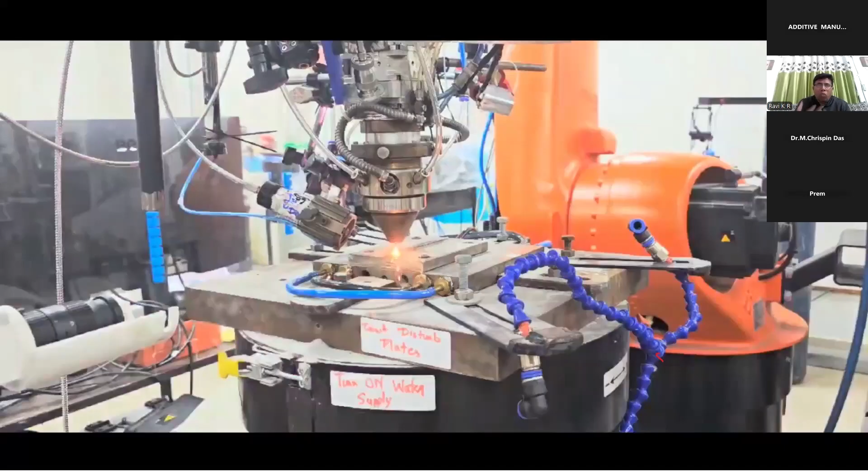Now we have developed hardware and software for closed loop control, meaning we are going to control the process. Without any control, I'm keeping the intensity as is. In this case, I'm controlling the laser power, because whenever it increases and goes up, I'm getting a threshold, similar to what we do in a furnace, and I bring that value down by decreasing the laser power.

You can see here, this is without control, and this is with control. If we look at the part made without control versus with control, with control means working with smart manufacturing, the geometry accuracy of the parts would be very, very good. On the other hand, without control, it would actually go in all directions and give a lot of defects.

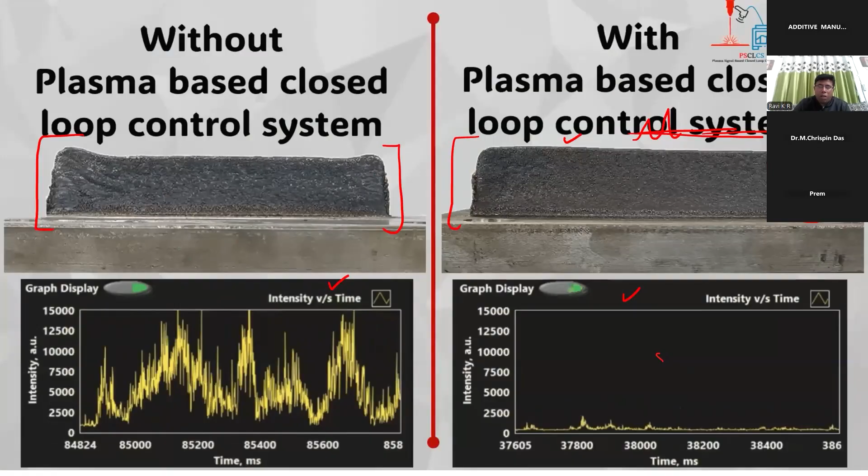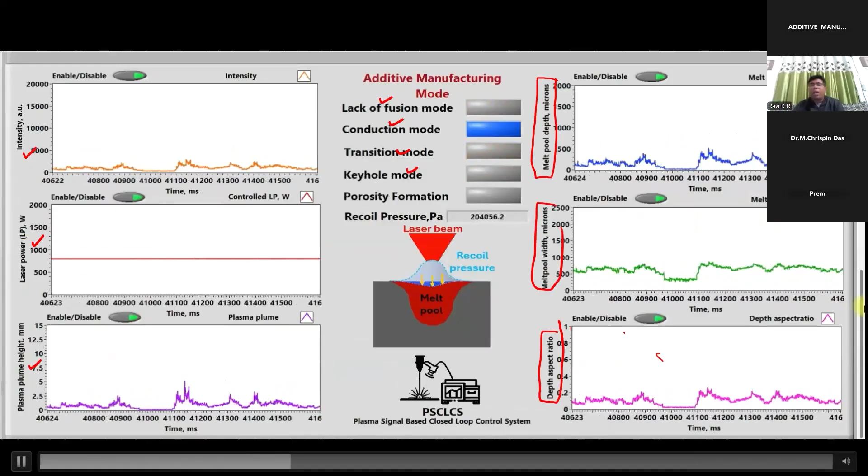In addition, the software we created gives you all the features required for printing, visible on a dashboard. It shows the laser intensity, the power being used, the plasma plume height, and whether we are working in lack of fusion mode, conduction mode, transition mode, or keyhole mode. We can get live details of melt pool depth, melt pool width, and depth aspect ratio. All these things are important, and this gives you an idea of whether you are in an appropriate printing condition or not. Now you can see that quantitative difference.

With all this intensity map, we translated it in the form of the XYZ axis. Then we were able to identify the locations where I'm supposed to get porosities. You can see here we are getting porosity. This is what our system is actually detecting. This region I'm supposed to get porosity, and I'm getting it.

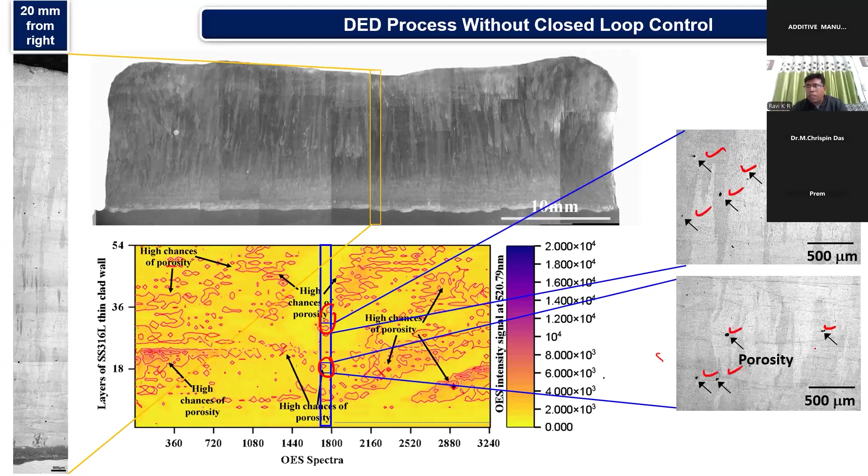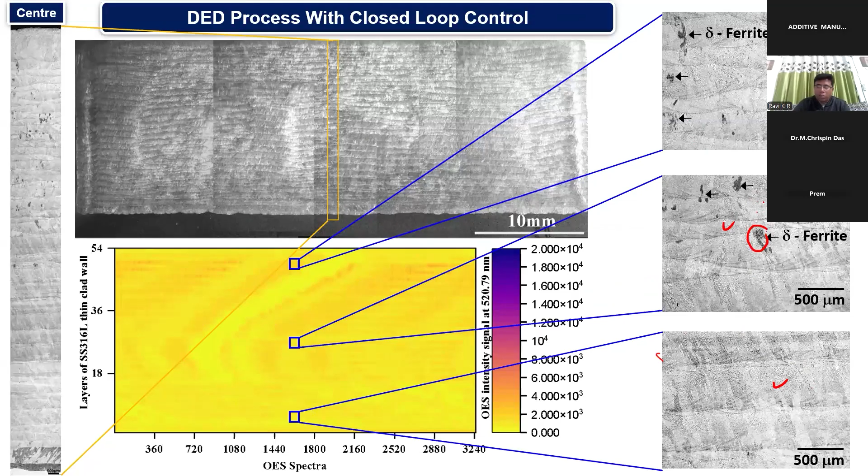So the beauty here is, as I told you, when you don't have any control, if you see here, I start with 1.6 mm. When I go on top, you can see the deformation of the part is happening. Instead of forming like this, it is going this way, so there will be a deformation of parts.

You see the melt pool width would be continuously changing. On the other hand, if I do closed loop control, what we are doing, you can get throughout the whole process, this is a 54 layer build, consistent melt pool width across all the layers.

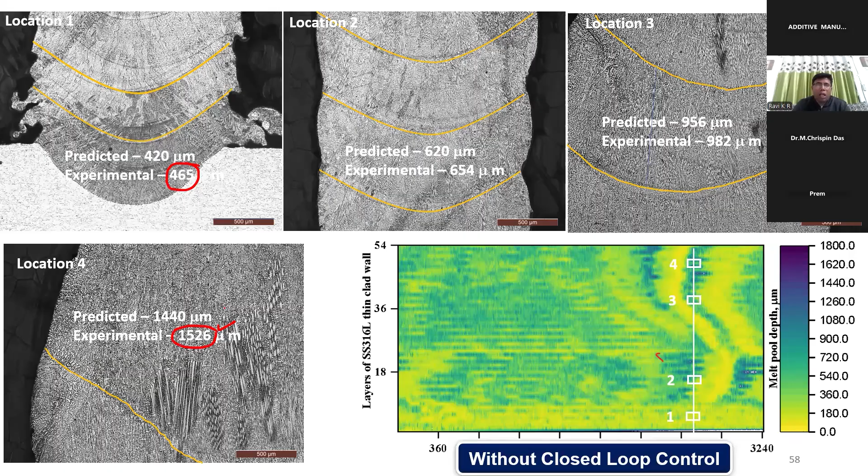Not only melt pool width, but also melt pool depth. Initially we start with 465, and when I go to the top of the layer, around the 54th layer, I'm getting 1500 micrometers. On the other hand, with closed loop, we start with 340 micrometers, and even on the top layer I'm getting 340 micrometers.